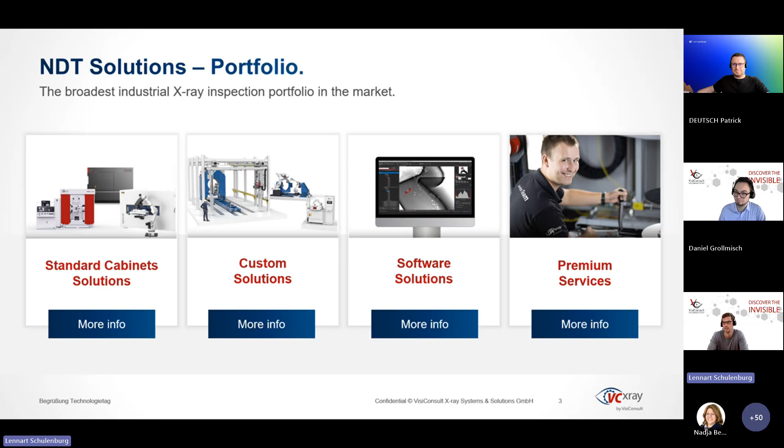So let's get into AI. Why AI or why ADR in aerospace? There are three distinct drivers. When we speak to our customers, we hear the same things. There is a lack of labor, and a lack of skilled labor, within NDT—too little entrants into the field, a demographic shift, an overaging society. The work itself is in many cases not attractive: shift work, sitting a lot in dark areas looking at screens. A big portion of NDT professionals is approaching retirement age. At the same time, we're seeing increasing inspection volumes, driven by more complex manufacturing technologies like additive manufacturing, rate increases like in the aerospace sector, or standards getting stricter, requiring more inspection. Additionally, we have higher cost pressure—we need to save costs, we're in a global recession in some countries, so we have to do more with less people and less cost. That's the requirement, and this is where AI comes in.

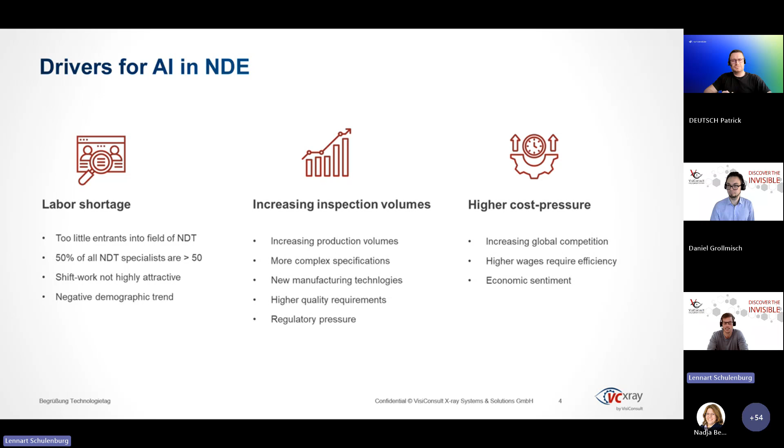But these are all very negative framings, and there's more potential to it, like increasing quality. How can AI help us actually inspect better—not only cheaper or faster, but really be better at what we do?

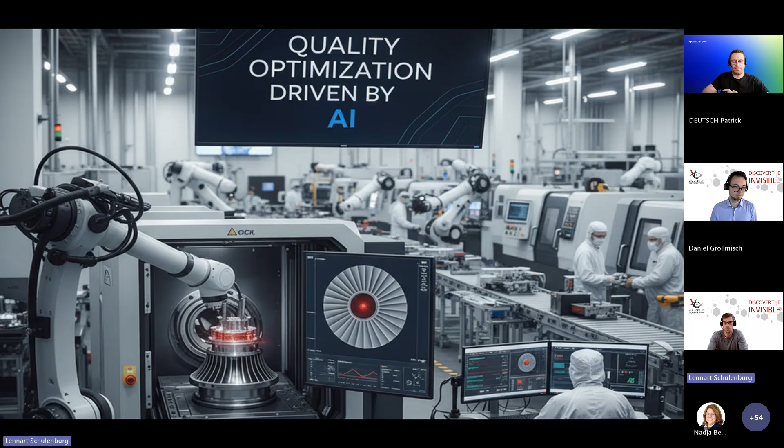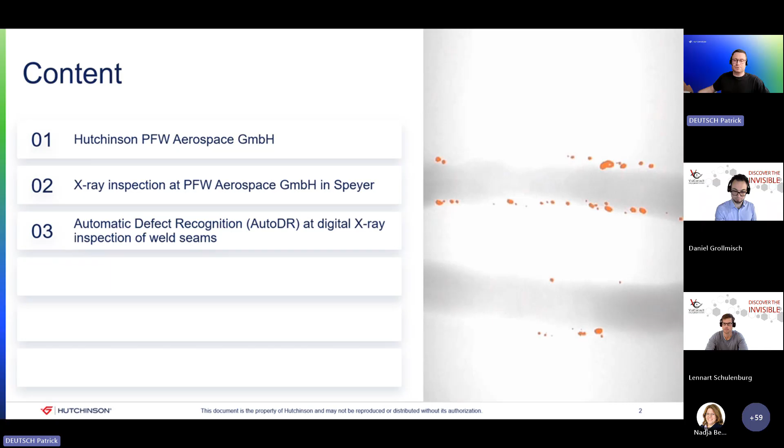Before we dive into the main topic, I will give you an overview of today's presentation. First, I will start with a brief introduction of our company. After that, I will give you an overview of how X-ray inspection is currently done at PFW. And finally, we will focus on the core of this presentation: automatic defect recognition in digital X-ray inspection of weld seams on the basis of artificial intelligence, AI.

PFW is a leading supplier in the aerospace industry with over 100 years of experience, founded in 1913. Today PFW operates across 3 locations in Germany, Turkey, and the UK, and has about 2,200 employees.

Our facilities cover a total production area of 60,000 square meters, enabling us to manufacture and deliver a wide range of components for the aerospace industry. Our product portfolio includes over 10,000 different part numbers, ranging from tubes and ducts to structural components. We have over 300 qualified in-house processes to meet the strict requirements of the aerospace industry, and about 60 different customers, whereby our main customers are Airbus and Boeing.

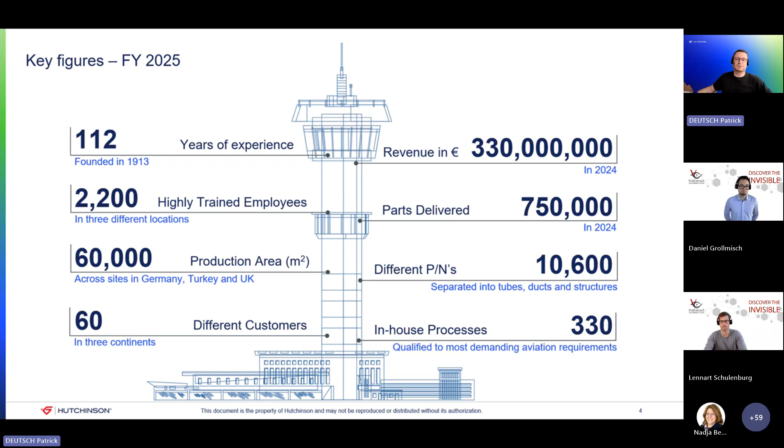PFW has 4 main product areas: tubes and ducts, aerostructures, design engineering, and forming and machining. In forming and machining, we use advanced technologies like a fully automated machining center, or metal forming processes like deep drawing, flex forming, and water jet cutting.

Our design engineering team offers complete build-to-specification capabilities, from the concept and design to analysis, verification, validation, as well as the qualification and testing of new products or systems.

The area aerostructures covers complex structural components for both the commercial and also the military aircraft. We produce belly fairings, light panels, cargo floor structures.

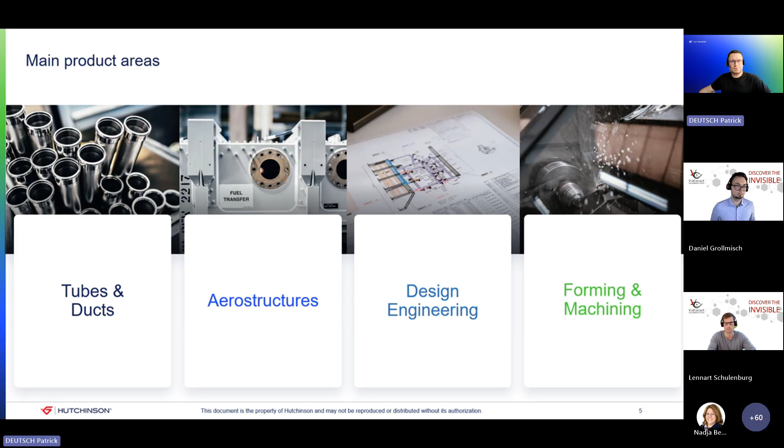And finally, the tubes and ducts, which represent the biggest core competency of PFW. The tubes and ducts are critical for the safe and efficient operation of aircraft systems, and they are used in different systems, like fuel systems, hydraulic systems, environmental control systems, and also water and waste systems.

Our portfolio includes thousands of part numbers, for example more than 4,700 for the fuel system. All these components ensure the reliable transport of fluids and gases throughout the aircraft, and they must meet the highest standards for quality, precision, durability, and weight optimization.

Tubes and ducts consist of several individual segments connected to each other. To join these segments, the tube and duct ends are currently either directly welded using TIG welding or equipped with flanges or coupling elements, which are also fixed to the tube end by means of resistance welding.

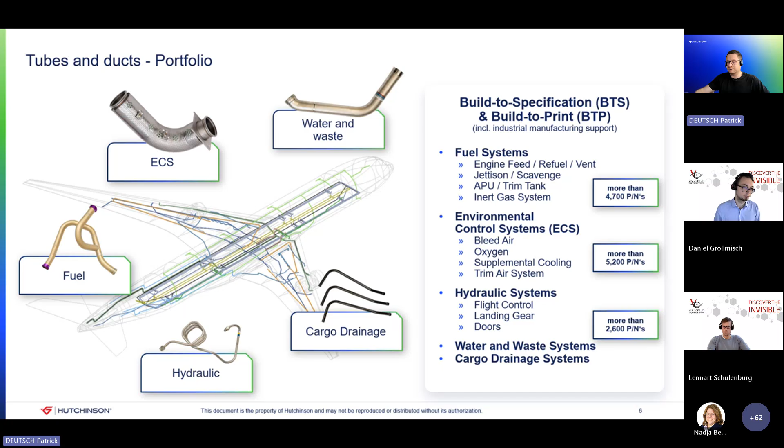Due to the high requirements in the aerospace industry, quality assurance is very important. To ensure the quality of welded components, they are regularly subjected to an X-ray inspection, in addition to visual and penetrant testing. This is why X-ray inspection is performed.

Until 2013, PFW only used X-ray systems based on film technique for the X-ray inspection of welded components. The feeding and discharge of the components, as well as their manipulation in the beam path, are carried out manually. The components are positioned between the radiation source and the film by a qualified X-ray inspector.

During this process, the X-ray system is blocked for active inspection operations. Depending on the required number of exposures, this manual positioning is done up to 6 times for a single inspection position or weld seam. So these manual positioning operations are time and cost intensive.

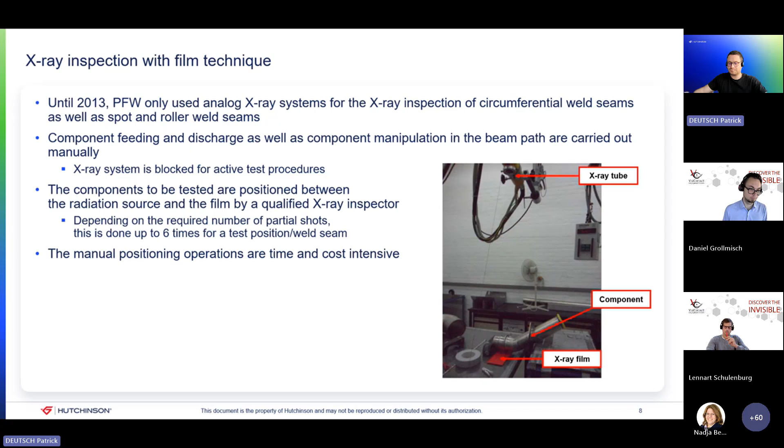Therefore, the first digital X-ray systems were purchased in 2013 and 2014. Here, the component manipulation in the beam path is mechanized, for example with a movable turntable. To achieve different beam angles, the X-ray tube and the detector can be moved using CNC axes. However, the feeding and discharge of the components still take place manually.

The first X-ray systems were for simple components like straight and small tubes with circumferential welds or straight longitudinally welded tubes.

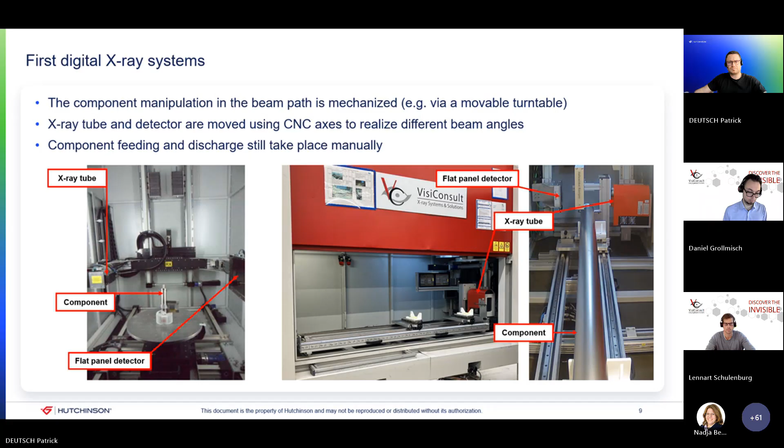As part of a research project, the possibility of automating the feeding, the manipulation in the beam path, and also the discharge of complex tubes and ducts using robots was investigated. This also included the development of functional gripper systems suitable for handling the components to be inspected by a robot, based on the identification and definition of gripping points in the current component design.

On the one hand, the throughput times and also the high personnel efforts and costs should be reduced with an automated digital X-ray inspection. On the other hand, the inspection capacity should be increased, which would additionally reduce the need for outsourcing X-ray inspection tasks.

After defining representative components, computer simulations were initially carried out to develop a suitable gripper system and also to determine optimal component handling. In the first simulations, the robot gripped the component at its end and moved it in the beam path between a fixed X-ray source and the detector. But the simulations revealed that the required inspection positions could not all be reached under those conditions.

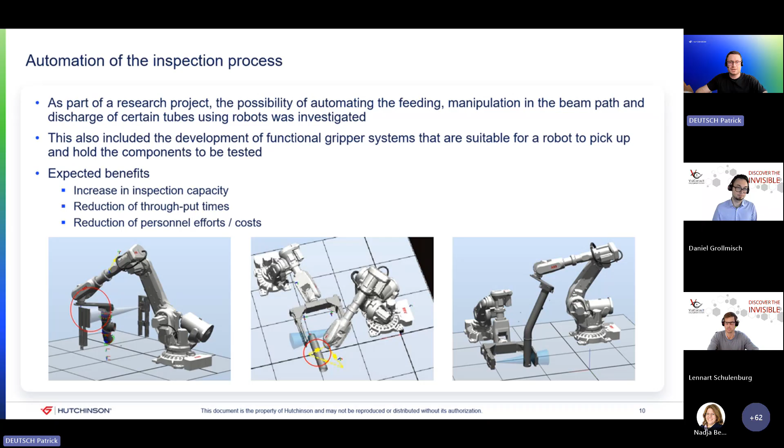However, a reclamping of the components is then required when inspecting both tube ends, since radiographic inspection cannot be performed at the tube end. On this basis, a concept for an automatic X-ray inspection was developed in collaboration with VisiConsult. In the developed concept, which you can see here, the component is equipped with the gripper system at its end by an operator and manually placed into a turntable inside a radiation protection chamber.

After a defined rotation of the turntable, the component is picked up in the X-ray room by a handling robot and moved into the inspection area. A second robot with a C-arm on which the X-ray source and detector are mounted scans the component at the required inspection positions. After the inspection, the handling robot returns the component to the turntable, and the component is then manually removed by the operator, and the gripper is detached from the tube end. If both tube ends require inspection, the process must be repeated.

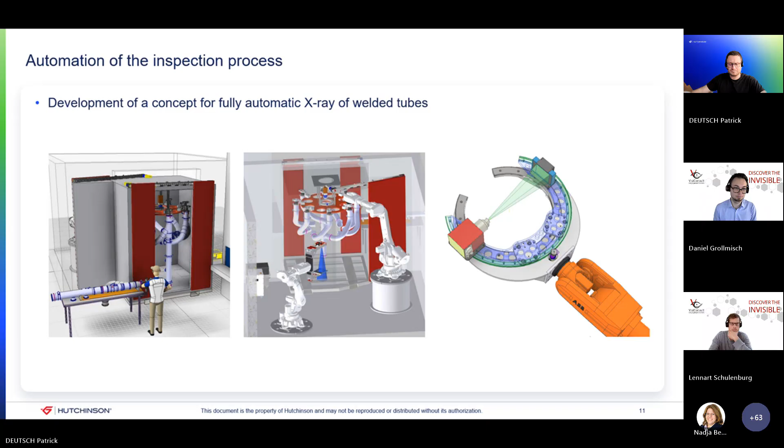The developed gripper system was then tested at VisiConsult through practical application tests with various complex components, and several aspects were considered and investigated: the component with the worst center of gravity, the longest and heaviest component, the clamping force of the gripper system, the repeatability of the robot movement depending on speed, and also vibrations on the component caused by the robot movement. The results were quite positive with the gripper system.

But during the practical test with the gripper system, we also examined the preparation and manual feeding of the component into the system. The developed concept included a loading height of 2.6 meters. It was determined that the manual loading of the turntable presents serious ergonomic challenges and risks. For example, we have a high physical strain due to overhead work, and also the poor visibility of the adapter bolts on the turntable for the gripper system complicated the positioning. So as a result, the entire loading concept had to be optimized.

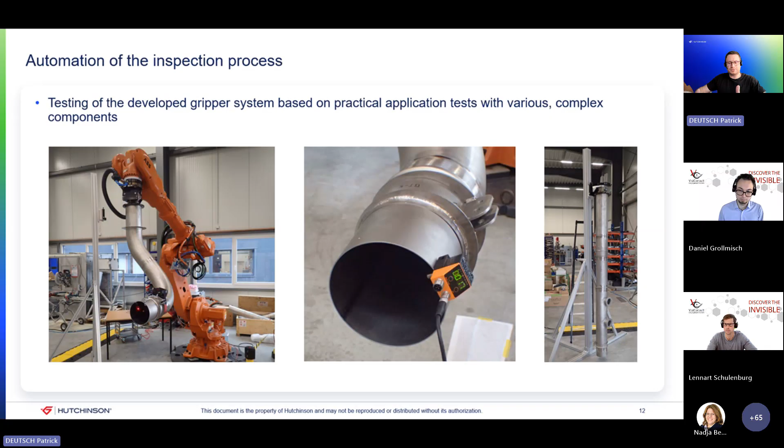But based on the developed X-ray concept and successful tests with the gripper system, an economic evaluation was conducted, which revealed a high saving potential for PFW, which then led to the end of the research project and its transition to industrial implementation. During this implementation, the overall concept was further optimized, especially the preparation and loading process.

Here you can see the optimized concept. In the optimized concept, the component is no longer manually placed into the turntable. Instead, it is placed on one of three transfer stations. Each is equipped with a universal positioning fixture, which ensures defined positioning of the component for a safe clamping by a loading robot. The exact positioning of the component for setting up the universal positioning fixture is displayed on a monitor. After setup and placement, the component's position is also checked using a camera.

If everything is okay, the loading robot selects the correct gripper out of a gripper change station, picks up the component from the transfer station and places it into the turntable. Then in the X-ray room, the scanning of the component takes place as in the concept before. Nothing changed there. After the inspection, the component is removed by the loading robot and placed on a conveyor belt. After the placement, the loading robot releases the gripper and returns it to the change station or picks up another component of the same type.

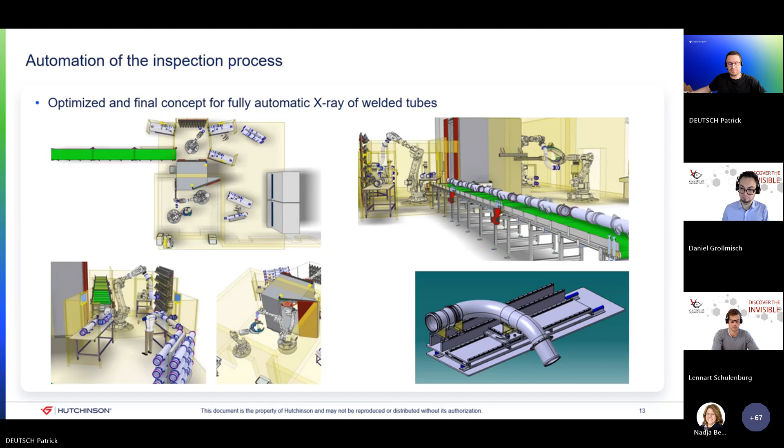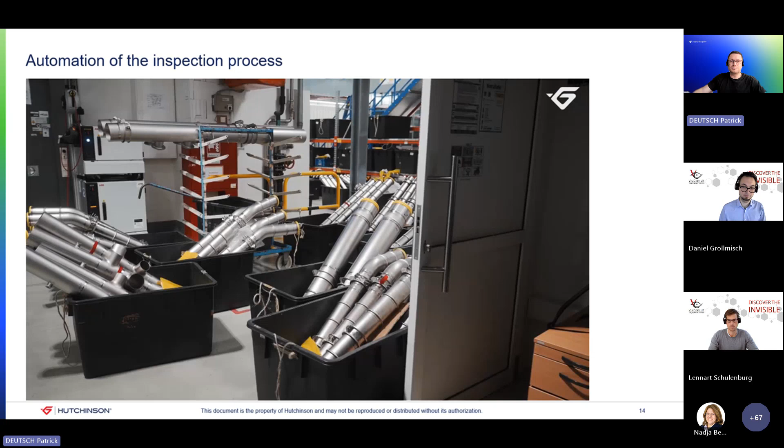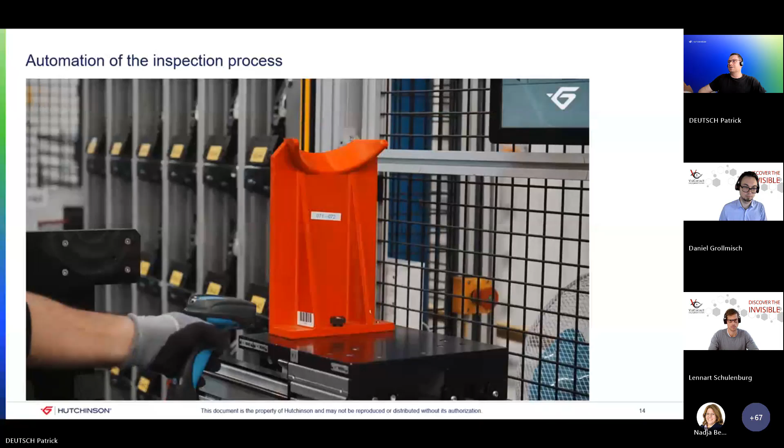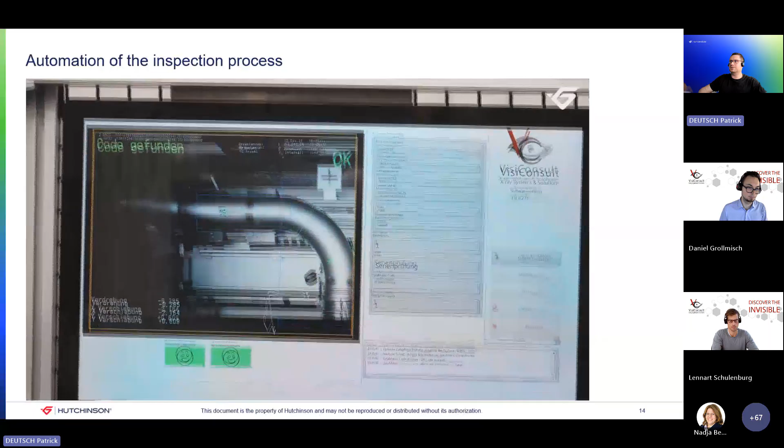So here we have now a short video of this automated X-ray system in our serial production. I hope it works. Here you can see the universal positioning fixture, which is set up by the operator. The component to be inspected is placed into the fixture. Positioning is checked by the camera. So here's the handling robot and the robot with the C-arm, which moves the X-ray source and the detector.

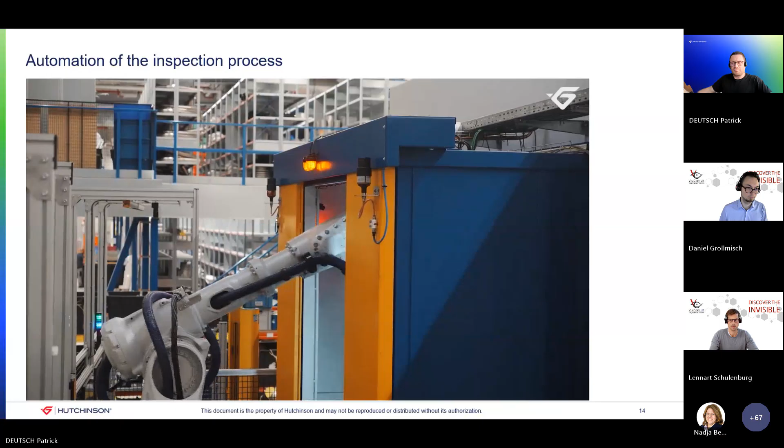Yeah, and with this digitization and automation of the X-ray process, the basis for an automatic defect recognition was created. And now we will come to the core of this presentation.

So currently, the digital X-ray images of weld seams are evaluated and assessed manually by a qualified X-ray inspector. The X-ray inspector uses a specialized evaluation software. It's the X Plus Review software from VisiConsult to evaluate, assess, and mark internal imperfections such as pores or inclusions. With this software, the X-ray inspector can measure the size of a single pore or can measure the distance between two pores, for example. And on this basis, the X-ray inspector makes his usage decision if it's acceptable or unacceptable.

And for next year, 2026, almost 1.2 million X-ray images will have to be evaluated and assessed in this way. And for this purpose, we have nearly 25 X-ray inspectors, level 2, with approval for digital X-ray inspection. And it's many people, and the X-ray inspectors are, I think, the highest paid workers in serial production. And this manual evaluation and assessment is a time and cost intensive process. And therefore an ADR shall support the X-ray inspector in evaluating and assessing the X-ray images by means of a specially developed AI.

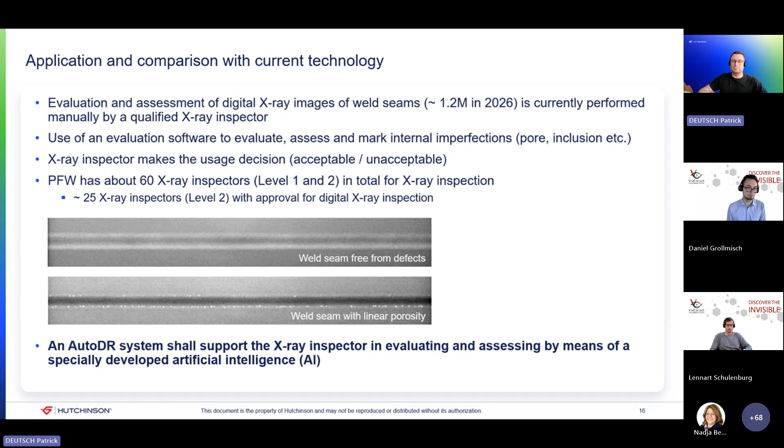So ADRs available on the market are primarily designed for castings and not for weld seams. Castings have other geometries and defect types and sizes than welded components, which make the available solutions on the market unsuitable for an application at PFW. To meet the PFW's requirements, this technology needs to be adapted to welded components and their requirements, especially with regard to the seam geometry and also the X-ray images with their characteristics, such as contrast and noise at PFW.

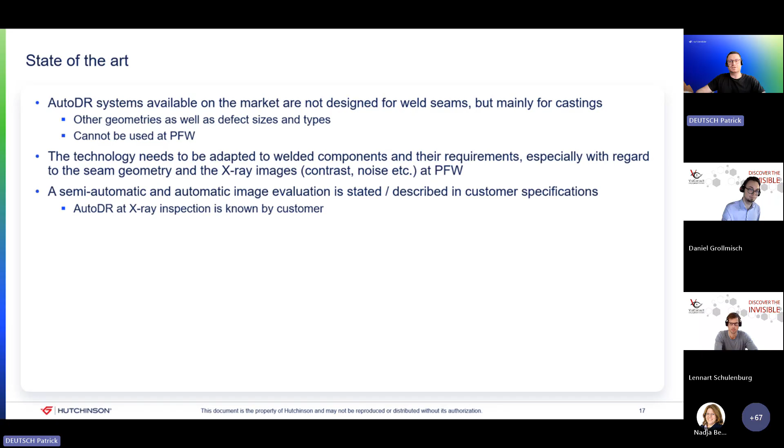But semi-automatic and automatic image evaluation is already described in our customer specifications, but only based on standard image processing algorithms and with many limitations, which make an efficient use in our serial production impossible. But the topic of an ADR is not new to our customer, which is why he's probably open to an ADR on the basis of AI. It could be an advantage.

So with the implementation of an ADR in our serial production, we expect several benefits: reduction of the personnel efforts and costs, because we need less time to evaluate and assess X-ray images. Also, we expect a reduction of our throughput times because we have a faster image evaluation, which improves the efficiency and the delivery performance. We will have an increase in our inspection capacity because a higher volume of digital X-ray images can be evaluated and assessed in the same time frame.

And we also will have a relief of the X-ray inspector, because the evaluation and assessment of the X-ray images require a high concentration. So the ADR will also improve the ergonomics and reduce fatigue.

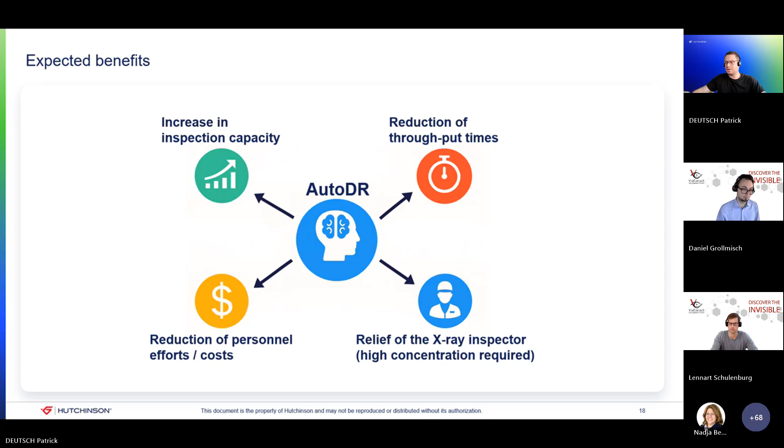In addition to automating the X-ray process in the research project, a first prototype for an ADR was also developed with VisiConsult. This prototype was based on standard image processing algorithms and showed that an ADR for weld seams is in principle possible. And on this basis, VisiConsult launched a pilot project to develop a universal ADR for weld seams. And PFW was asked to participate in this project as an end user. And the aim of this pilot project was the development of a prototype and its proof of concept.

And in this pilot project, we provided VisiConsult with digital X-ray images containing internal imperfections such as pores or inclusions for the development and training of an AI prototype. And as in the research project, the initial focus was on mechanized longitudinal welded tubes due to the uniform and reproducible seam geometry, as well as the contrast in the X-ray image.

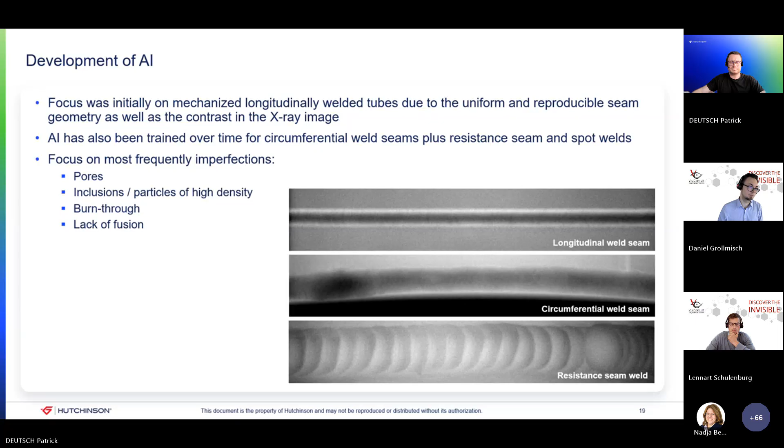To assess the reliability of the AI model, key indicators were defined. And for this a truth matrix, also called a confusion matrix, is used. This is a tool for assessing the performance of a classification model, especially in AI and machine learning. This matrix shows how well an AI model performs in predicting classes by comparing the actual values with the values predicted by the AI model.

In the columns we have the ground truth or the actual value. Here the X-ray image either has a defect or no defect. And in the rows we have the predicted value of our AI model, defect or no defect. And with this truth matrix, we can identify weaknesses in the AI model, for example, whether it produces too many false positives or false negatives.

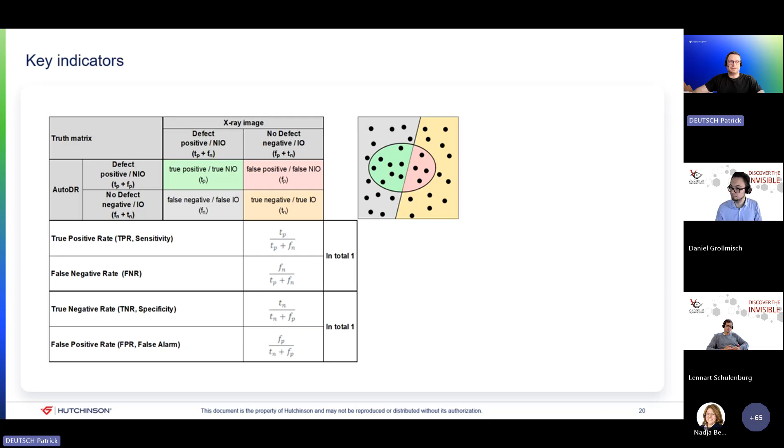So in the beginning, the AI model predicted many false positives, which are not the critical ones. We had a lot of dead pixels or pixel defects, which were detected by the AI model. But it's just a pseudo defect, it's just one pixel. And the other false positive example is noise in the X-ray images.

So it looks like it would be an imperfection like an inclusion or a particle of high density, but it's not. It's just noise in our X-ray images, and these indications had to be trained out from the AI model.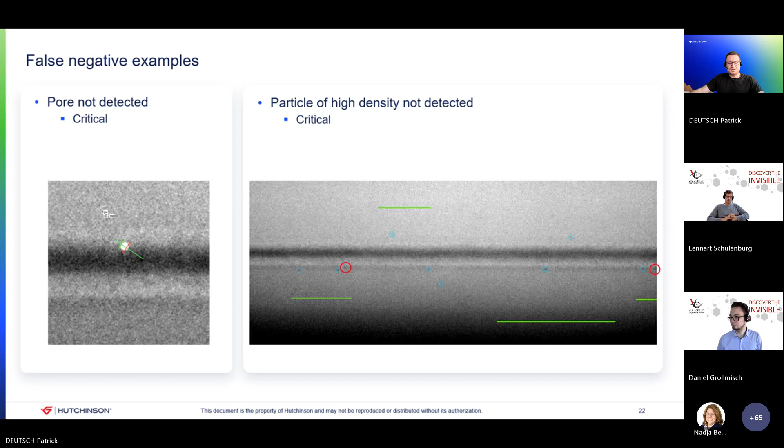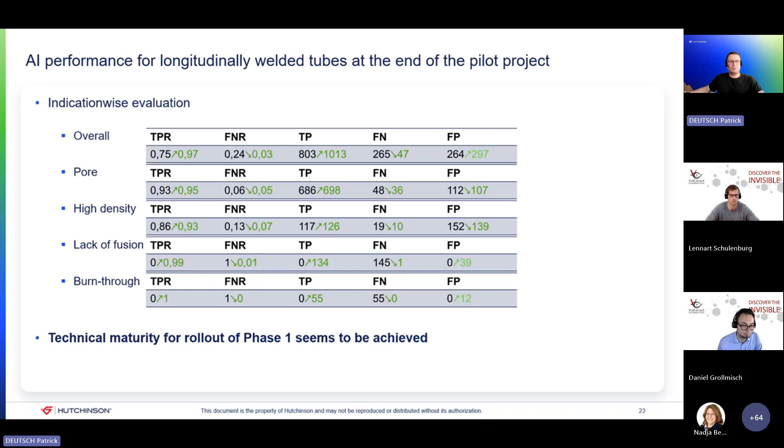The amount of false positives was quite high, but these defects, as I said, are not critical. They are just an additional effort later in evaluating and assessing X-ray images. So the AI performance here showed that the proof of concept was successfully demonstrated, and the technical maturity for our rollout of phase 1 was achieved.

So what is phase 1? With phase 1, the pilot project ended, and the further development of the AI model was divided into 3 phases: phase 1, phase 2, phase 3. Phase 1 is an assisting defect recognition. In this phase, we generate data to get to phase 2. Here, our X-ray inspector evaluates and assesses the X-ray images as before.

And after that, the AI highlights the detected indications or internal imperfections, and the X-ray inspector compares his result with the AI result and then assesses the AI result. And in the case of a poor AI result, these X-ray images are corrected by the X-ray inspector and used for further training of the AI model.

Phase 2 would be the semi-automatic defect recognition. Here, the AI model shall sort out all X-ray images in which no indication is detected by the AI, so the assessment would be okay. And only the X-ray images where the AI detects something shall be evaluated and assessed by the X-ray inspector to make his usage decision, whether it's acceptable or unacceptable.

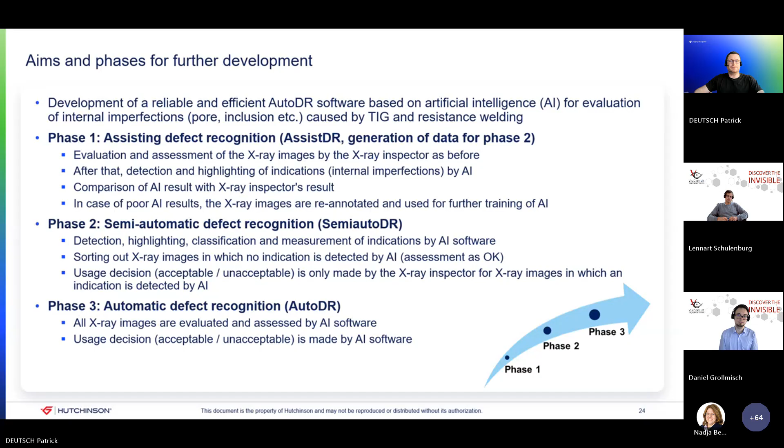And we are currently in phase 1. We started last year in September with this phase 1. And I will now explain with this picture how the process flow is.

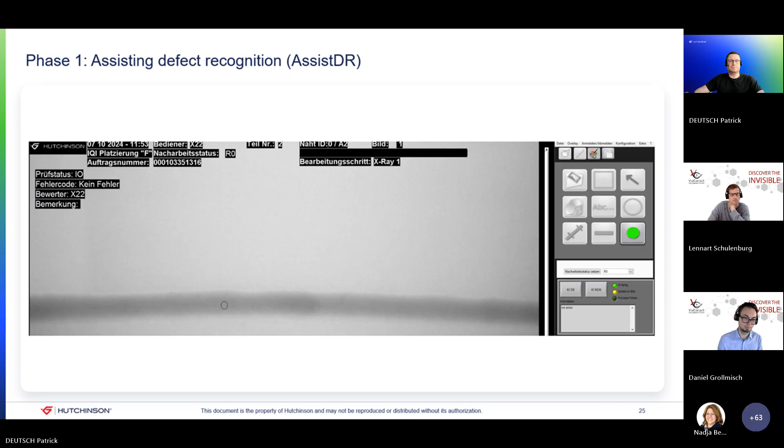So after the X-ray inspector evaluated and assessed the X-ray image, the AI result is shown to him, and now we see this circle, but in reality we have no indication here. So the X-ray inspector would say the AI result is not okay, would click the button, and this image would then later be recorrected with another software tool. It's the VC Review from VisiConsult. With this tool, the images can be corrected by the X-ray inspector.

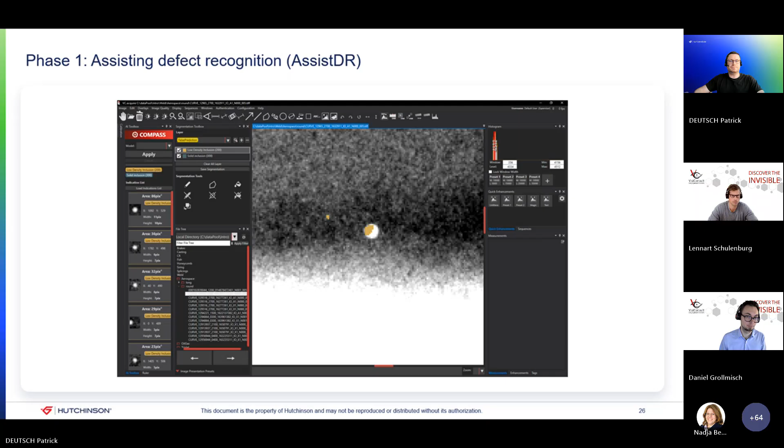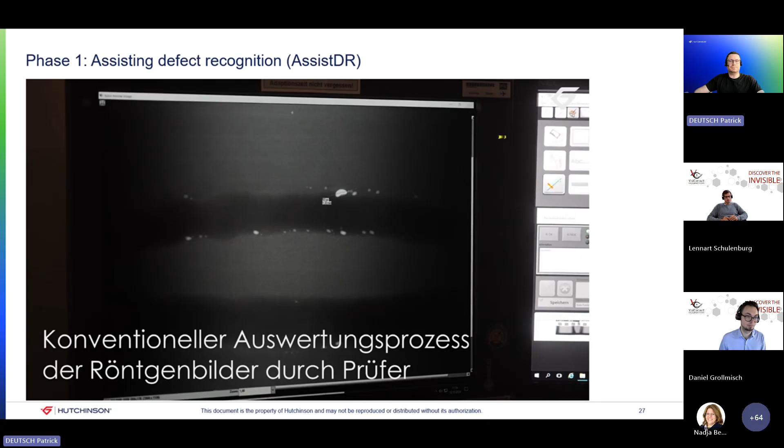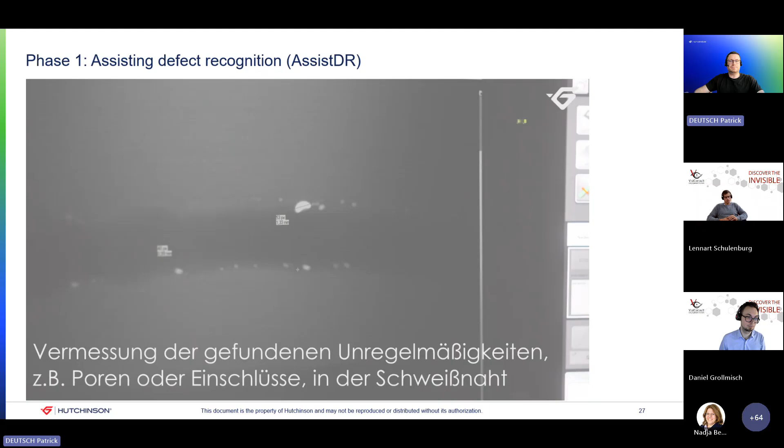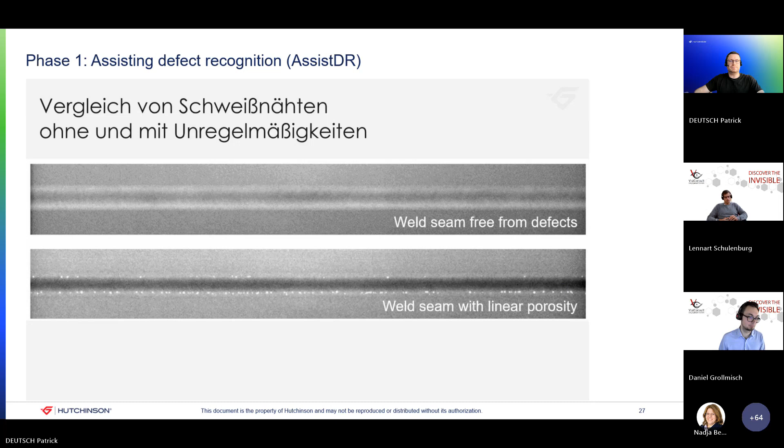And now here's a short video we recorded to present the current status in our PFW employee app. Here you can see how the evaluation is currently done. The X-ray inspector measures his pore. And as I said, in the background, the AI then analyzes the X-ray images.

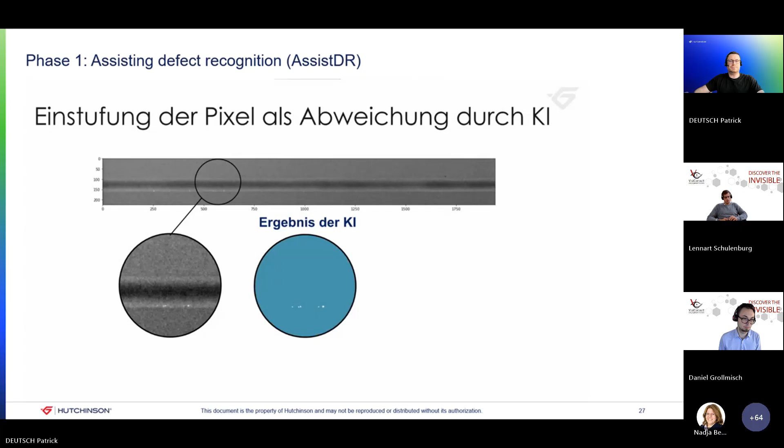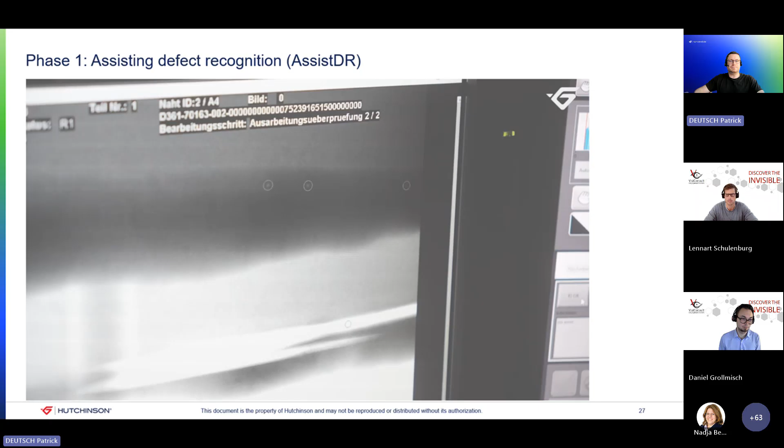So currently, detected defects are highlighted by the AI with flashing circles. And as I said, the X-ray inspector compares his result with the AI result. And with these generated data, the AI is further trained and optimized.

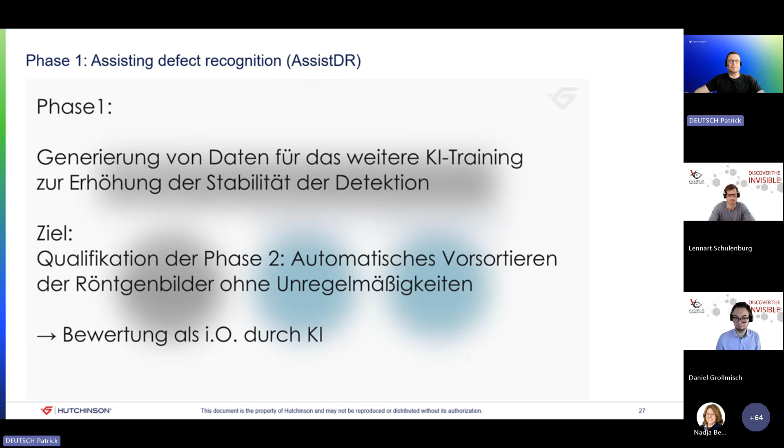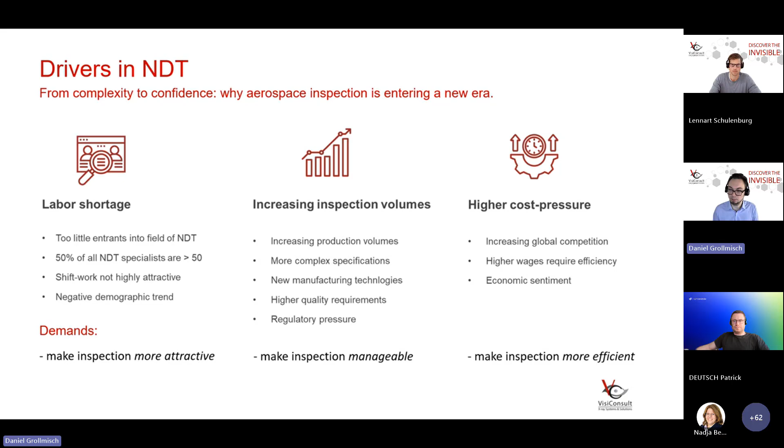So to meet this growing need, VisiConsult took action and created the Compass platform, our navigation system for this new inspection landscape. And we believe that cutting edge technology powered by human AI synergy can actually turn data into reliable decisions. AI sees patterns where humans can understand their meaning, and this partnership in mind let us build tools that actually adapt to every possible workflow and level of automatization.

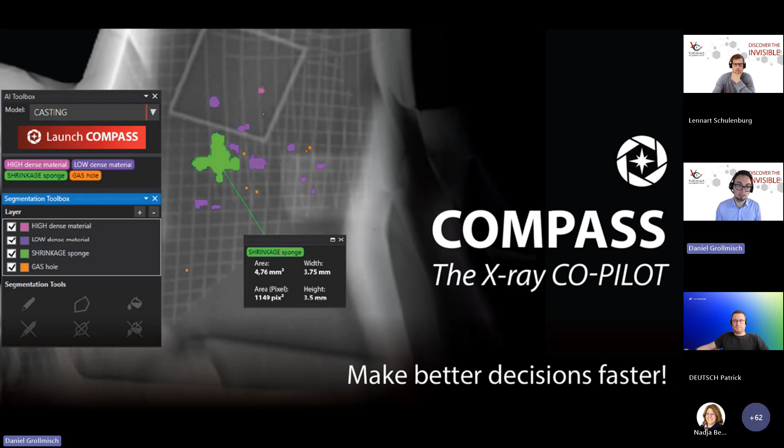So now the question is how to use that AI in NDT inspection. Patrick gave us already a very good insight in how to use it as an assistance tool to increase performance, but there are also other possibilities which I want to introduce to you today a little bit more in detail. So further, we could apply besides the assisted AI tool other tools to enable, for example, sorting of parts or provide a pre-evaluation, or even have an agentic AI which helps us find the final decision or having it actually fully automated.

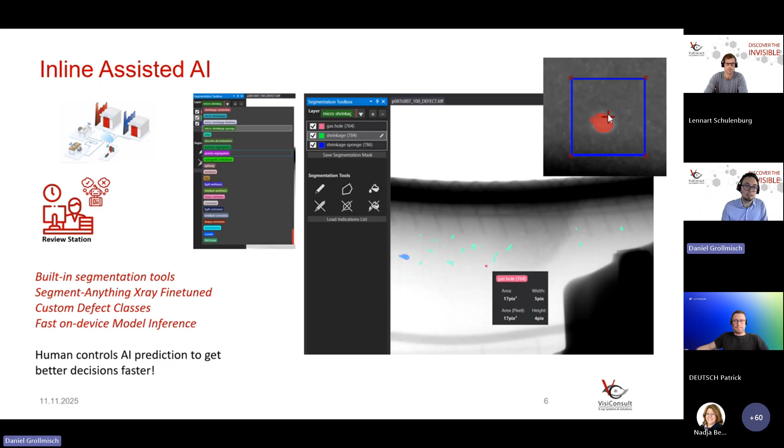So let's start slow and look into the inline assist AI, which is what PFW has right now in place. We have a built-in segmentation tool. We built in custom defect classes and fast on-device model inference, which helps all the different X-ray application machines to streamline into decisions of real-world assets, to really have the human in control of the AI predictions and to make the decision faster.

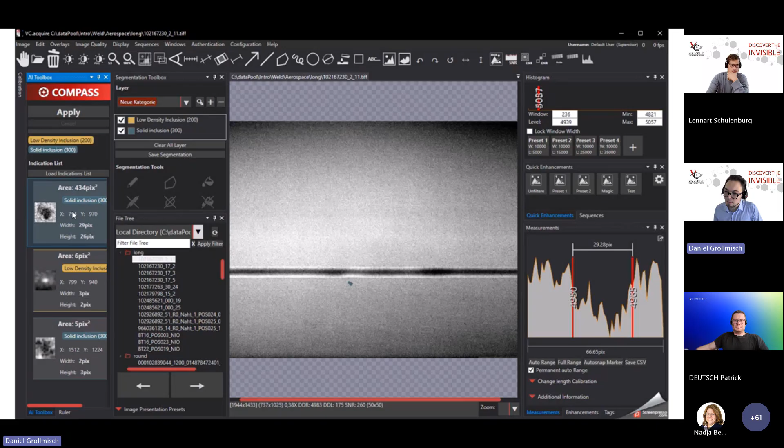So now when we look into the inspection, this is now our VC.acquire, our inspection software. When we look into the inspection of a PFW weld seam, one focuses automatically on what indication is the biggest and most prominent and tries to measure that one. And we want to have our decision based on this. But what we often miss, due to maybe, in this case, dirt next to a weld seam, we could miss actual indications just due to the human nature that is focused on maybe misleading patterns.

So what we want to have here is kind of a safety net to find even critical indications where a human could overlook this. So that would be an inline AI fail-safe loop, if you want to say so, an AI applied after actual human inspection. That would lead to no bias to the user. We can have the AI as a double check for a four-eyes principle inspection, if you want to say so. And there are many other applications we could bring into

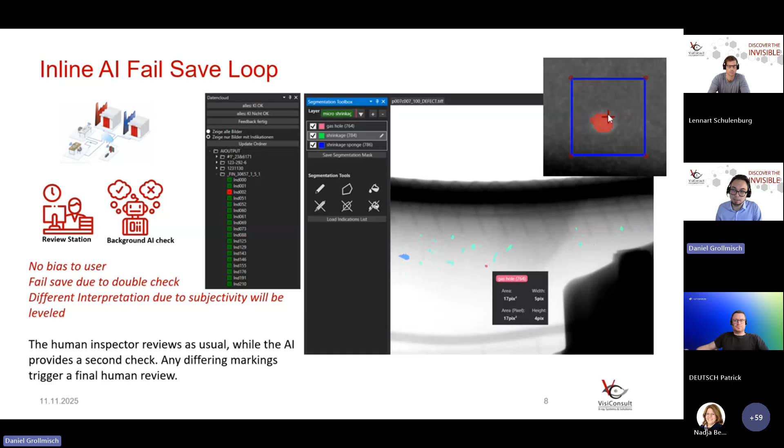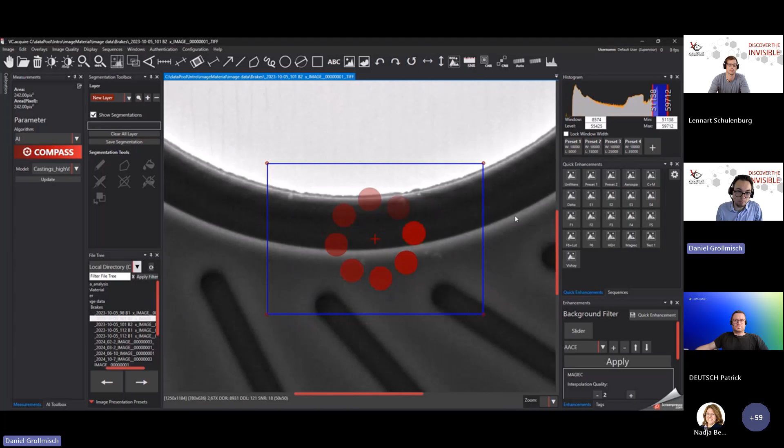your workflow. So another one would be that we have just manual inspection and only use the AI to measure the indications that we as humans actually detect, and get rid of the sometimes a little bit clunky tools for that measurement, and also the inhomogeneous measurement that different operators apply to the different defects. And still, the decision is completely on the human side.

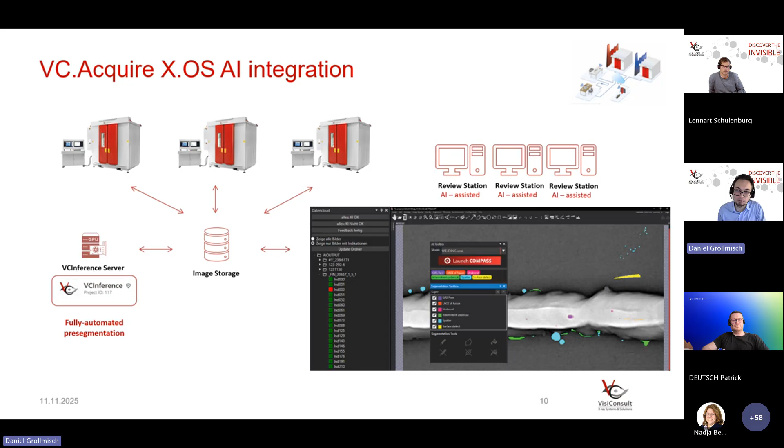So since we do not only offer inspection software, but a whole platform, a landscape of different softwares that can feed into each other, we can provide an end-to-end solution and have, for example, instead of an inline review, also kind of a pre-segmentation of all the images and having a review later on all the stored images. So we can provide with one inference server different applications, different objects as well, like we have done in PFW, one model applied to longitudinal welds, circumferential welds, and the point welds.

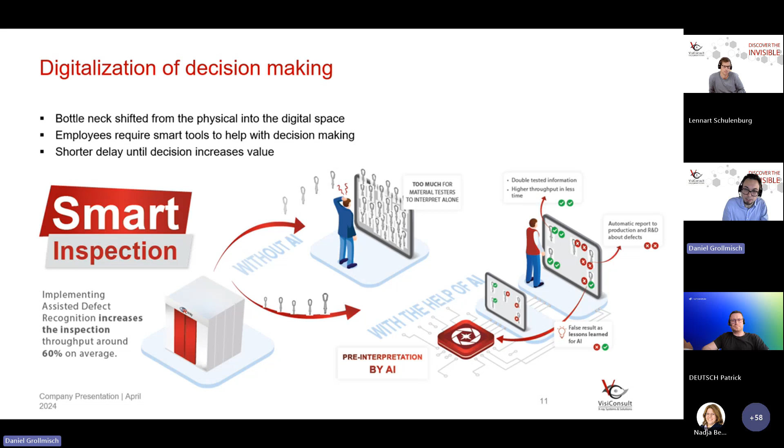So now when we look into the decision making, which we want to digitalize as well, we have to go even further down the rabbit hole and find ways to use our cutting edge technology to provide these different tools that you're looking forward to. And the very first thing that comes to mind would be to pre-sort all the parts or images that actually are clean, especially in weld inspection. Like 95% of all the images have no indications at all, no defects, and humans could reduce the effort to focus on what is actually important to look into, have a more streamlined inspection and increase efficiency a lot here.

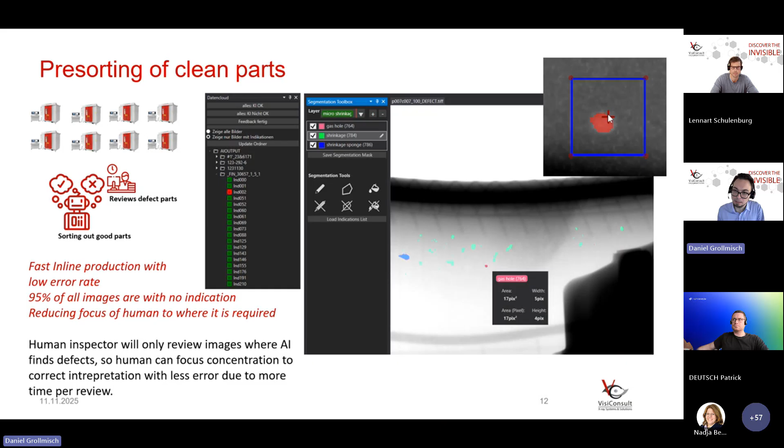So now when we look into more complex parts like castings, there we often have a very historical background on the defect recognition.

Like we have different views, we have to create a program to have repetitive inspection angles, having image registration and enhancements, and have to create a lot of different algorithms and zones to have an ADR working on those castings. This needs a lot of time, but AI now is applied to the full image regardless of the position, since we find defects regardless of geometry, but regarding the type of production we are looking into.

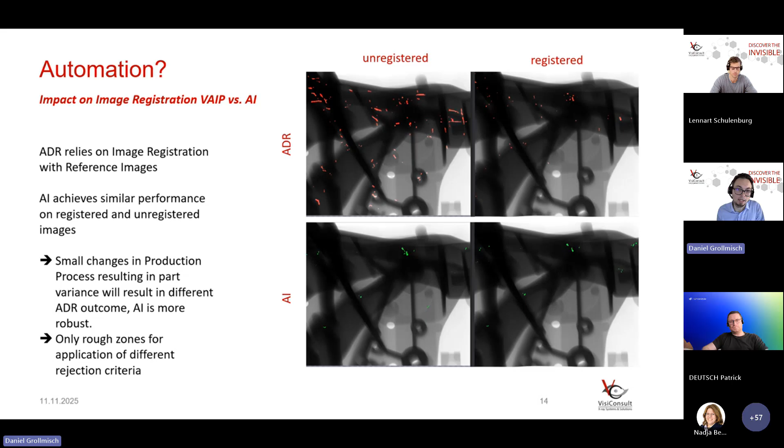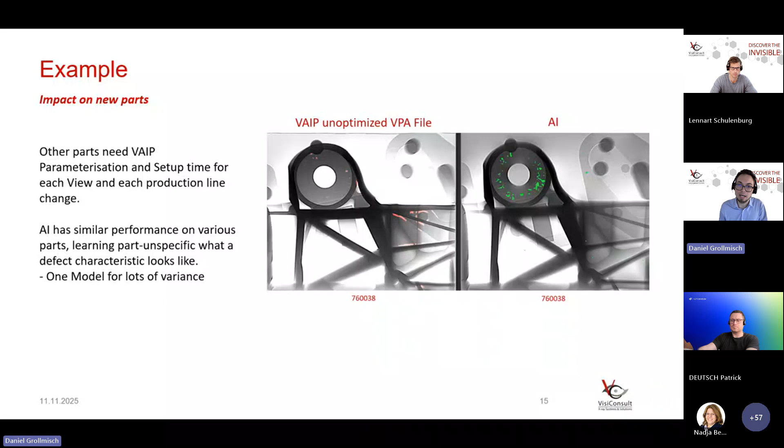So even if we have unregistered or slightly shifted views, we are very robust with AI in comparison to conventional methods of ADR. So even when we change our product line and add or change a part, AI would not have any problem with that. We have out of the box directly good results and can go into the inspection more fast and are more flexible with the whole process.

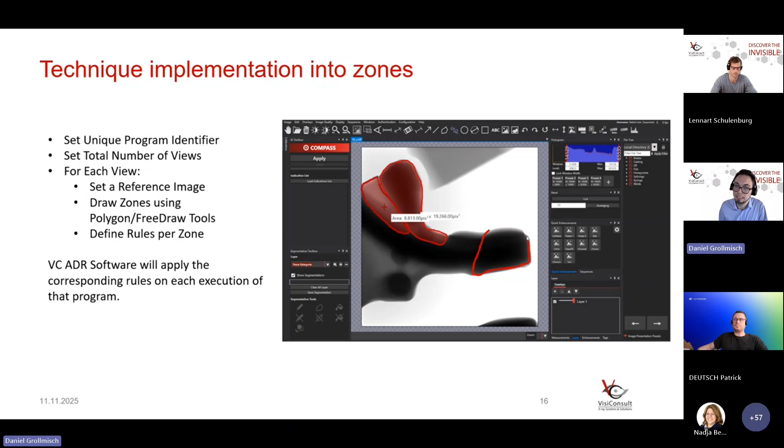Of course, we cannot skip the zones completely, since we need to create some zones, at least roughly, to apply criteria to different parts, to different regions. For weld seams, this is not a lot done, but especially for castings, we have different safety zones. For that, we can easily create this criteria by text, adding this configuration to the zone and having it applied to the different zone.

Going into the next steps of automatization, which is a semi-automatic decision, where we now have actually in the background only the observer as the inspector, and having an AI system that already suggests decisions based on several fitting modules. So one module would be one AI that brings up indications found in the castings.

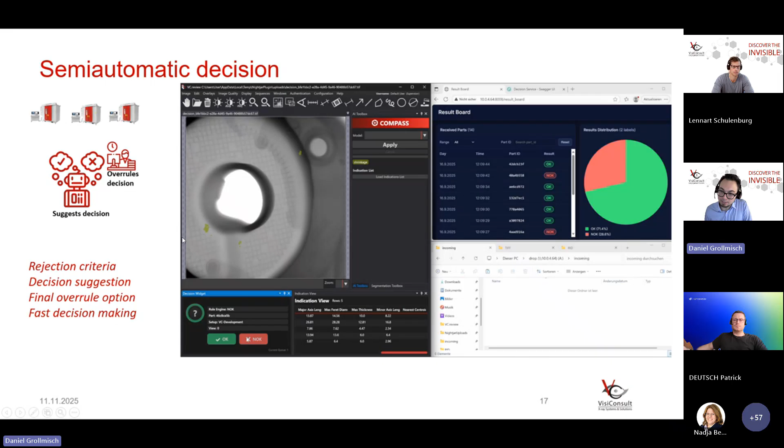Another part of the software would be providing the criteria zones for this special view that we are looking into. And the next part would actually look into how the different indications are clustered, how big they are, automatically measured. You can see here in the bottom side, we have an indication view with all the different indications inside one image. And based on the zones, we have a suggested decision which can be overruled or agreed on. So live, that would look like this.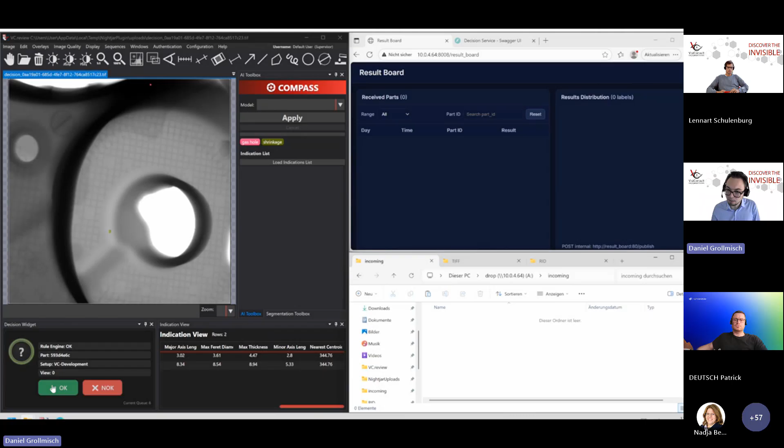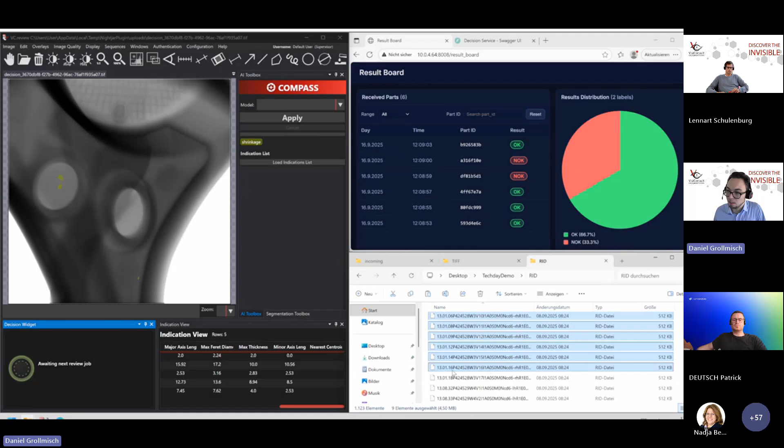We just apply now a simulation of acquisition of data, which goes from one machine into one inference computer, and the user can now just accept or disagree with the results of the AI. And also you can directly see a results board where you have statistics over the actual inspection running through your lifetime production, and can mirror what actually defects can occur and where they do occur, gathering a lot of valuable information that you were not able to gather before.

Of course, we can have that as well in a compliance mode. So we have the inspector doing the decision completely on his own, and the AI runs in the background, and both do the decision. Then we compare the decisions finally: is this part rejectable or accepted? And only if it differs, then again, for example, another level 2 or level 3 has to review this part for final decision. But the downside of that would be that we reduce the efficiency that we actually want to gain.

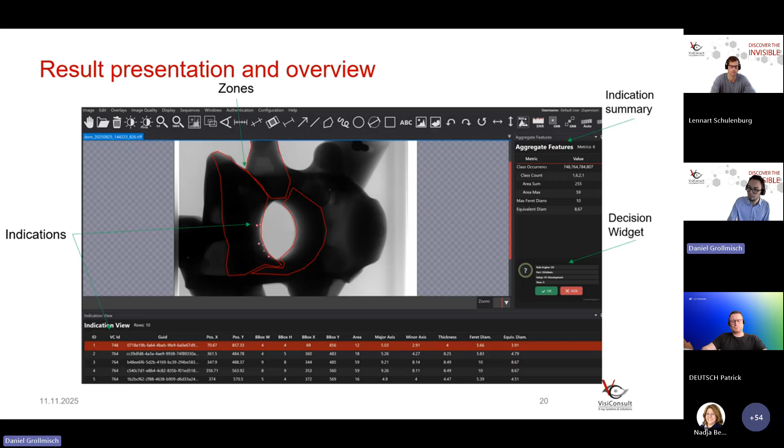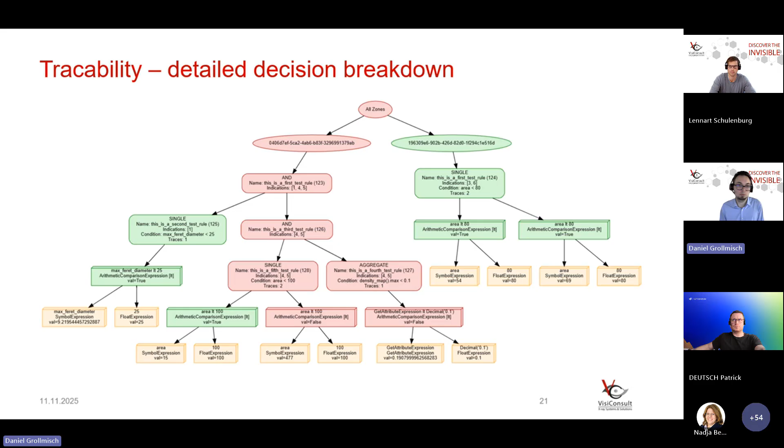So finally, we can look into the rejected parts, having all the zones visible and also the indications inside those views. We have an indication view where we can click on those indications, find the automatic measurement, find the decision, and can trace back how the decision by the AI was done, what rules were in charge of having that part rejected, and what rules were actually accepted. Due to this transparency, we can easily derive valuable information for the production lines and qualify the process at the same time with the standards we have already given and those right now in process.

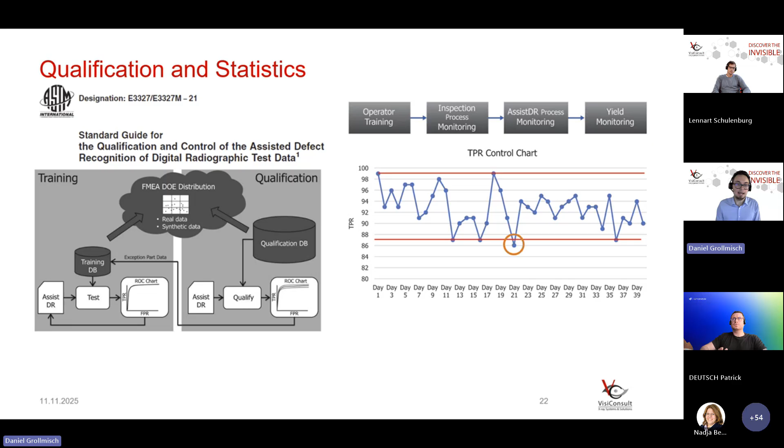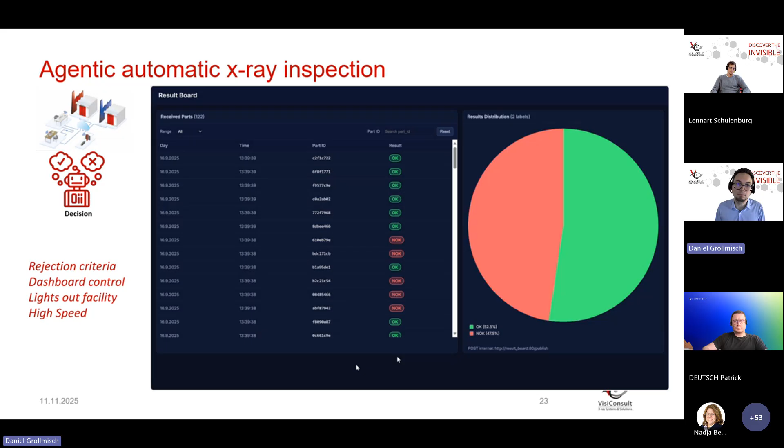So then the last step that one could think of would be an agentic automatic X-ray inspection, where we have the human in the loop as a control instance and not as an operator who is doing the decision where applicable. Of course, this is the last step of automatization and needs a lot of different qualification before. But then we could easily run a lot of data in a lights-out facility. Here we simulate the actual speed of such a solution, where we have, at the speed of copying to the hard drive, the decision made by a full system based on zones, based on configurations, and based on rule-based decisions.

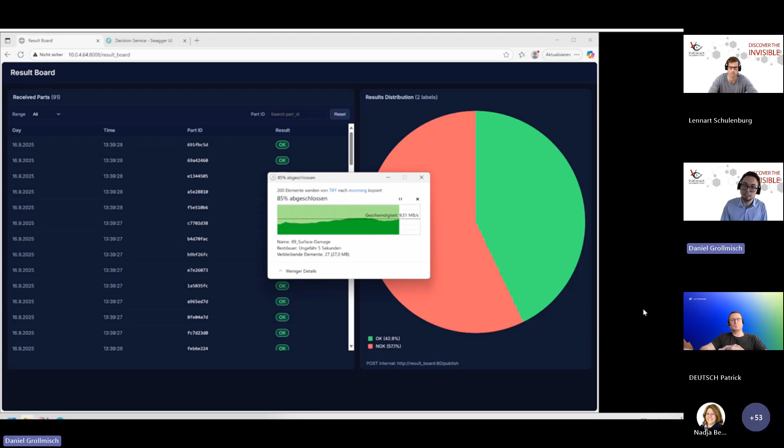So let's come back to the question in the very beginning: how to use AI in NDT inspection. The question isn't if, but how AI will transform inspection and how you will take part in that transformation. So let's start small. Maybe just choose one process, one data set, one challenge that you encounter often. Send us some data for a free AI checkup, and let's see. We can guide you from a proof of concept to production.